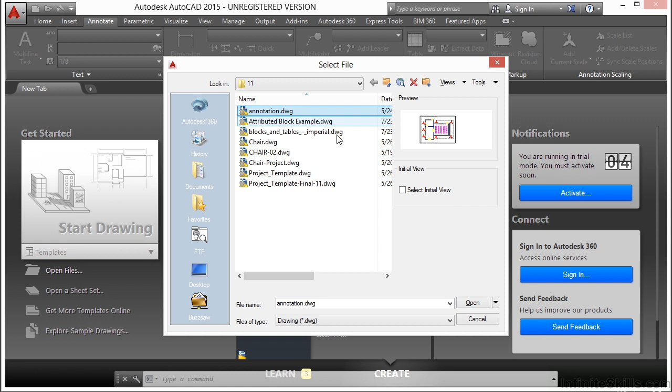Let's open up the annotation file for this chapter. In this file, you're going to see some examples of blocks, some of which we've used in other sections. Go to the Model tab. Here we have some blocks of some bushes or trees. Here we have some blocks of chairs, blocks of windows, and blocks of doors. Some of these are regular standard blocks, while others are what's called dynamic blocks.

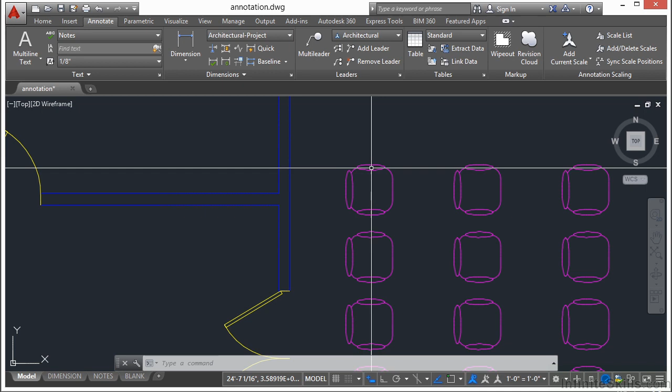Blocks are a group of objects combined to form one object. Each part is still intact and can be manipulated, of course, but only while in the block editor. Otherwise, they act as one object. This allows custom shapes and designs to be made and to act as one object. If this chair wasn't a block, then we would have to grab every bit of line, object, ellipse, arc if we wanted to do anything to it. Now I can use the move command and I can move this chair very easily.

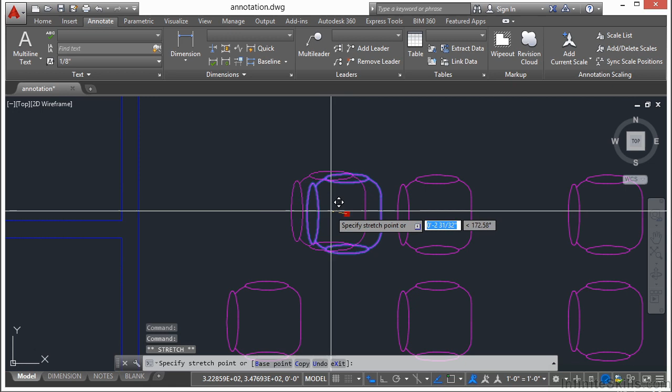Blocks can be made out of any AutoCAD object. This chair here is made up of arcs and ellipses and some lines. When I select it, it acts like one object, and all of them are on the layer that it was inserted on. Also, when selected, the block only has one grip, as you see here. That's the insertion grip, and I can move my block by that grip. Every block has an insertion point.

Now, the objects in a block can be created on any layer inside the block. If they are drawn on layer 0, then they will take on the properties of the layer that they were inserted on. Like this block here is on the chair layer, but the objects inside it are on layer 0. So keep that in mind. If objects are drawn on a specific layer inside a block, they will retain that layer's properties regardless of what layer the block is on. So keep this in mind when creating blocks. This is one of the reasons every drawing has a layer 0.

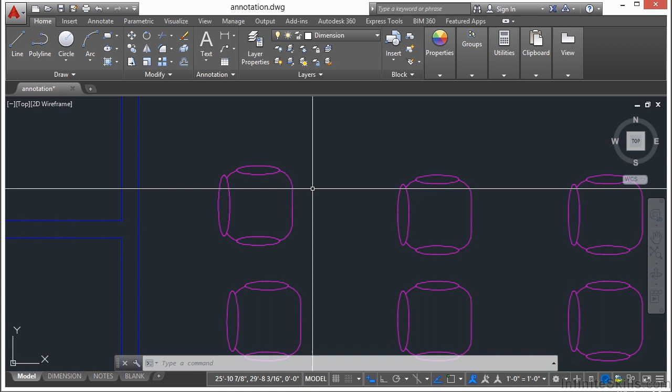Blocks are meant to recreate objects quickly, like the chairs and the doors that you see here. They can be copied, rotated, scaled, moved, erased, and more. They can be saved, inserted, and used again. You can export them as their own file so that you could use them somewhere else with a WBLOCK command.

And it's also a good practice to create a block library somewhere. That's a folder where you have all of your blocks saved in it. Organize it with subfolders so that you know what they are. Like make a subfolder of furniture, so all of your furniture can go there. Make it whatever it is that you need. You can keep it there and organize it so that you can find them and use them in future drawings. If you make a block for a project that you're working on, it might be a good idea to save that block in your library, because if it was important enough to make for this one project, it might come up again and you might be able to use it.

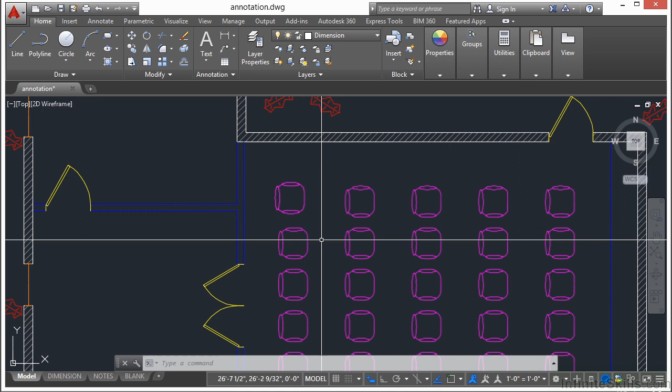Another common use for blocks are title blocks on drawings. A lot of companies will set up a block that is their title block. It makes it easy to control, to manipulate, and it keeps it on the drawing the way it should be and the same way all the time.